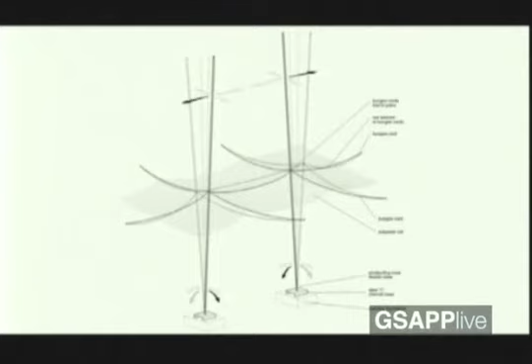Within this environment, we inserted activators such as hammocks, ladders and misters. Then these poles are connected to the ground with only a pin connection, allowing them to be dynamically moving within the system.

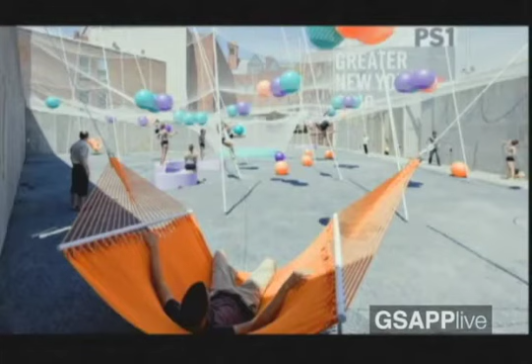And with this, various activators as we call it—the wind, the pressure of the water, and the people playing—the system becomes something that the subject engages with. With this structure, we hoped that the people would re-engage with the physical world and find playfulness within their interaction. Another important thing was really the desire to create an interior, so very much a space that you enter rather than an object. So the sensorial, the spatial, rather than the form-driven architectural project was something that we were trying to experiment with here.

Another component of this project is that within the small courtyard next to the big main space, as the environment of the immersive and interactive part of the installation, the 8 poles in this small courtyard have the accelerometer, which is this device that detects the motions of objects, embedded in them. A sound engineer programmed an application that would transform the data of the motion detected into a tone, music, or sound that can be played in the space through speakers.

And also some application designers have gathered this data and put them into an iPhone application so each pole can be claimed on your mobile phone, and through clicking through them you can manipulate the effect of each of these poles, the sound they make, and together. There's the play button—there's actually a play button here. Interesting.

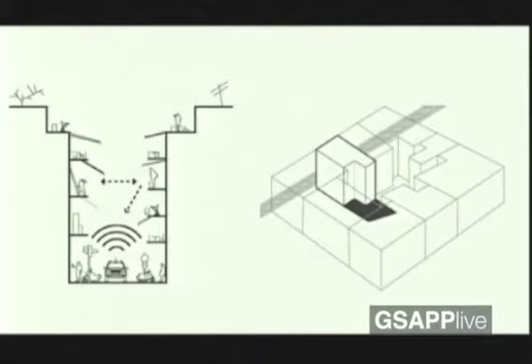The neighborhood is indeed in transition - a working class neighborhood, very dense on the ground, with typical loud streets, and yards in the back that aren't really used. There's a big disconnect between what's happening in the street and what's happening in the back.

Through a simple operation, possible within the local code, we shifted the bulk of the mass on the site and created an opportunity to make a new typology - especially one for the young, for college students.

It's a time in your life when you're still willing to rethink how to live in the city, how to live with one another. This small, simple shift also creates equality for all the units - a very democratic move, which seems quite appropriate for the location of the competition.

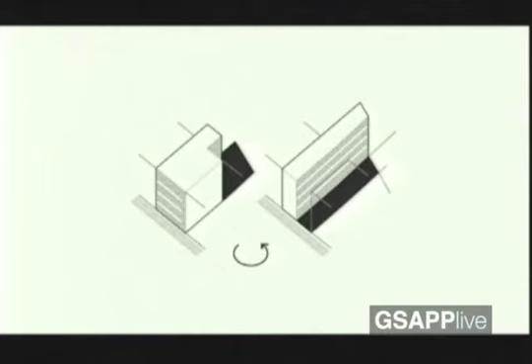What it also does is really open up the street into the yard - it opens up the block and brings the public in, allowing this zone to become a buffer between the units and the street itself.

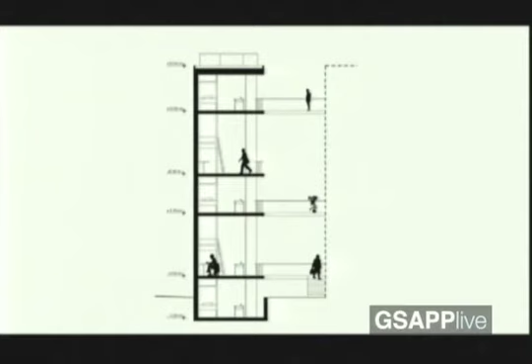This gives you a very narrow and slim section of building - 4.5 meters of building and 4.5 meters of yard. So we designed it very precisely, almost like a Japanese capsule hotel.

We wanted to give all the students their own private unit, not some large collective dorm-style living. Everybody had their own unit, but we organized it in zones, from super personal and closed, gradually to more open and public.

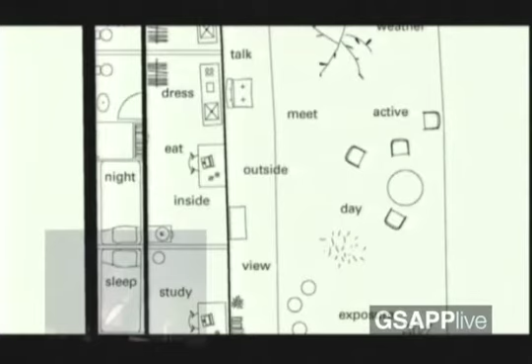I think the age for which this typology and building is designed is exactly you guys - where you jump from very intimate and concentrated modes to very open and exuberant ones. So we tried to pack these different modes into a very small, confined section.

Here you see almost a Frankfurter Küche-style efficiency in the room, where you study, cook, and sleep, with a view out to this yard.

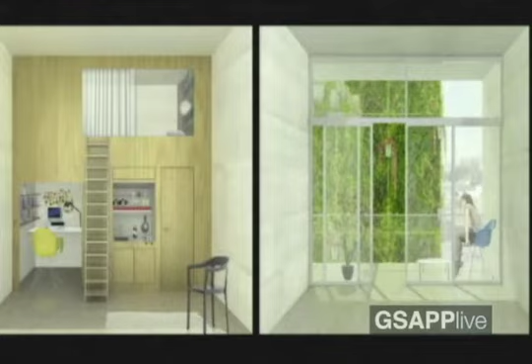This yard is actually a vertical yard, so you see all these lives happening within this elevation. We varied the section to generate some variety also in the spaces.

Ultimately there was a puzzle to try to get in as many units as possible - between 16 and 18 - with shared terraces as a way to move up in the building.

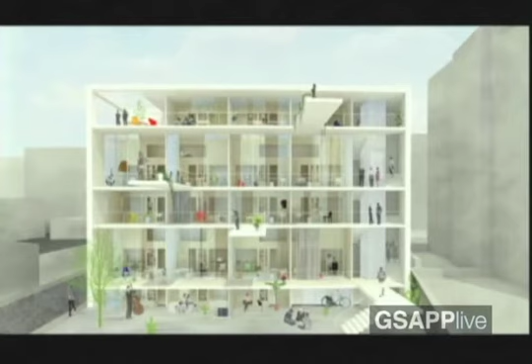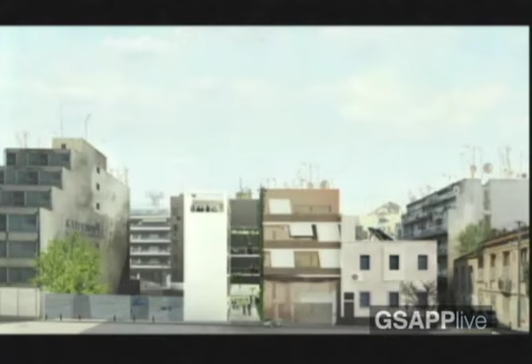Getting to your room means also passing somebody in front of their window - a way to stimulate social exchange as well. And there's the yard that can be occupied by students, with a very clean, simple, and abstract facade within this chaotic neighborhood.

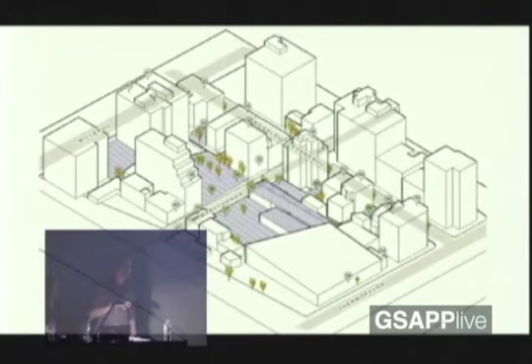Part of the competition was not only to come up with an answer for one type, but to look at the neighborhood as a whole and think of this as a viral typology that could start taking over the entire neighborhood. We were actually one of the finalists.

We didn't win the competition, but we were among the last 5, and could further develop the scheme - especially our strategy of opening up the block. If you did this on all sites, the whole urban fabric would start to change, and rather than having this hard division between street and inner court, you get a much more porous and diffused urban fabric. This was our argument as a strategy to take over the entire block.

What was interesting is that although we weren't selected for the final project, the next day this young developer called us and said he liked the strategy, and that it works very well on other lots he has. So we started working on a much larger lot on the other side of the street, right here, which is something in development now.

Obviously, also apart from the US, Greece is also suffering somewhat from financial constraints.

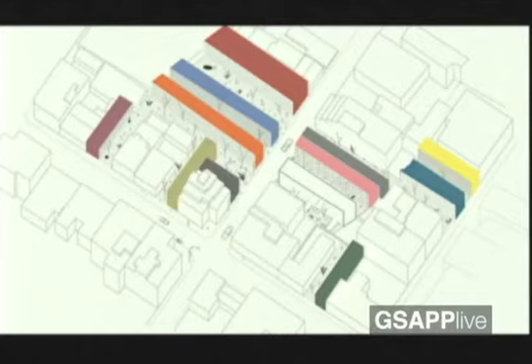So at this moment, let me show you where we are. This is the other side of the street, facing the site where we did the competition. This site is much deeper, actually, and it allowed us to think of more variety in typology.

There was a shift towards young families, and a desire for a coffee shop and a cafe. So the idea was that these different buildings, as it takes over the neighborhood, have different amenities that can be shared between all the units.

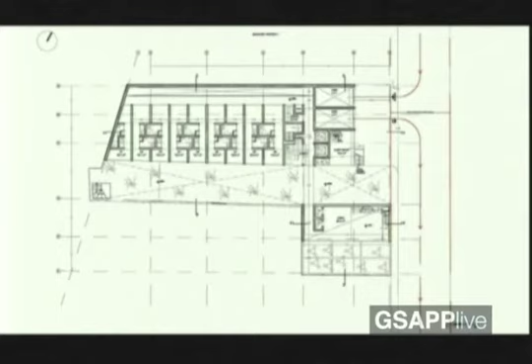The complication here was also that we had to include 3 stories of parking. So this became a very intricate puzzle, ultimately with how many units? Yanis, how many units did we have?

Yanis and Ilias from our office are also here. They worked very hard on this project. I think we ended up with around 50 units.

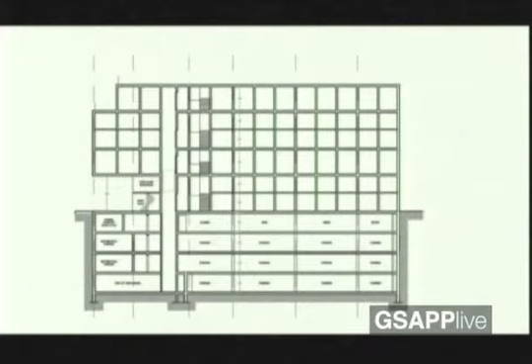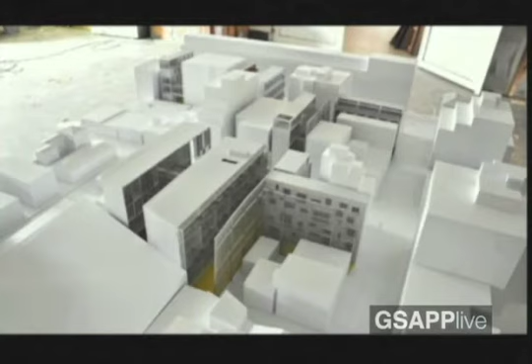This project at this moment is developed up to schematic design, but we continue to push it, not just to keep it alive, but also because it is an exploration for us of how you can think about the city. This is an exhibition we had in Beijing at Studio X, where we assumed that we had taken over the entire neighborhood with this typology, and wanted to see how it would develop.

Third project, which keeps us in Asia, is something we're working on right now in Seoul. This is downtown Seoul, basically the north. It used to be the old town. It's a view from a mountain towards the castle, the main castle. I'm sure there's people here from Seoul who probably recognize it.

This is, I think, called Samcheong-dong. Maybe somebody can correct me in the room if they know it better, but it's basically the old downtown area where there are a lot of old courtyard homes.

The idea behind this project is driven by two things. One is very local and specific, and the other is more our internal idea and research, or discussion that we have within the office. But as Mark said, we are here to speak about ideas as well, not just about solutions.

At some point, a student presented her work, and she said, well, this can be sort of kind of, well, whatever. We initially thought it was quite a lame description of her project, but then realized that maybe everything these days can be sort of kind of whatever, because in the past we made buildings to do something, but now we're doing a lot of this stuff online or in the virtual realm. So almost everything we make can maybe be sort of kind of whatever.

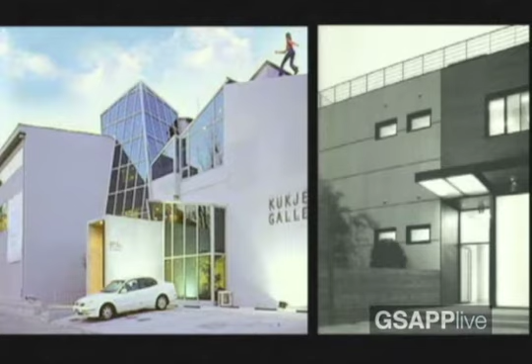Ms. Lee has been quite successful in doing that. These are her first two buildings, Kukje Gallery 1, which she started about, I think, 20 to 25 years ago, and her second building, Kukje 2. So those two were built, and when they came to us, they had sort of infiltrated this neighborhood. You see here these old holdouts of other homes.

But this neighborhood is becoming very popular. It's a very nice, walkable area where people come on weekends, young couples, to eat their puffy cream and drink fancy coffees.

We were asked to look at the third building over, which is here. The first two exist, and at this moment our work on this is expanding to redesign the first and second buildings. We're making adjustments there, but initially we were only asked to think about this third building, and we're working also on this fourth building now. This relates to Greece in a way, in the sense that it becomes a porous, semi-public piece of city.

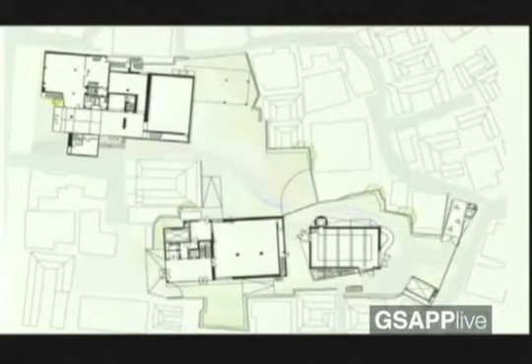Let's talk about this third building. The idea is this hard, simple white box moving into this dense, fluid, and historic fabric.

It's one of the multiple galleries, and Seoul is getting a little nervous about these larger boxes moving in. But the requirements, especially this one, called for a large project space—15 meters by 10 meters, 7 meters high—one big space for large installations.

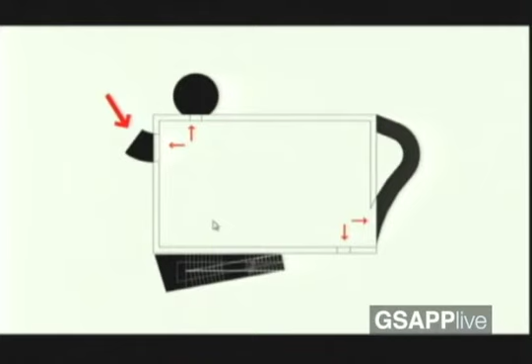So we provided them with the box, and in a very straightforward diagrammatic way, we pushed out the circulation and the entrances. You keep the pure minimalist white box, with a simple entrance, elevator, corridor downstairs, and stair up pushed out.

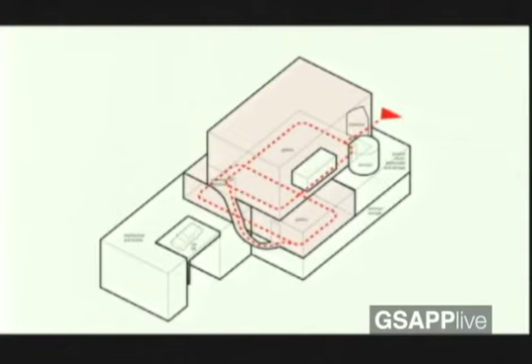It's a large basement. There's a lecture hall downstairs for presentations to their collectors, and a second basement with storage and parking. That's pretty much the scope—a simple white art space with skylights all around.

Daylight is important. Then we had to think: how do we bring this white box into this urban fabric? So this idea of deliberate ambiguity came up—making something that, because it's not hard-edged but softer and more diffuse, could act as a negotiator between this historic fabric and the hard edge.

Within traditional Korean painting, there's this idea of layeredness, a diffuseness, a fogginess. We also found a contemporary photographer they represented who captured that same cloud-like quality in their work.

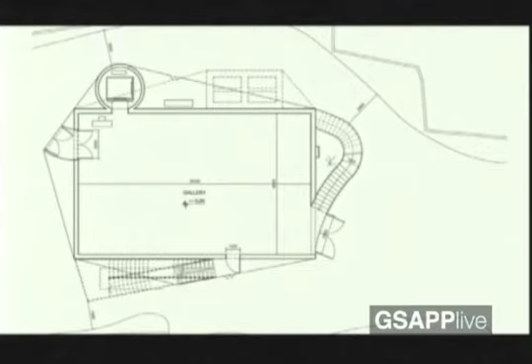We thought, what if we take this diagram and shrink-wrap it in a layer of diffusion, in a way? It sounded great.

And we made a model, and we indeed literally shrink-wrapped this diagram into this reflective sort of armor. We presented it, and Ms. Lee said, 'That's great, make it.'

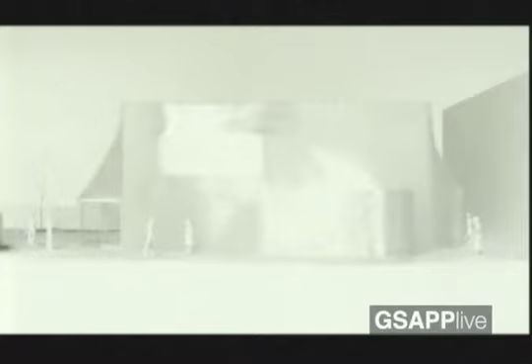We first had to get approval from the historic committee, so this is the file we had. Especially this diagram, I think, is quite strong in showing how well it fits within the neighborhood. And so we got an approval.

Then the question is, of course, great, but what is it? We had to think—especially because this is a double curvature, it's complex, but at the same time it needs to be exterior, so it needs to be strong. So what is strong, what is durable outside, and can take on a double curvature?

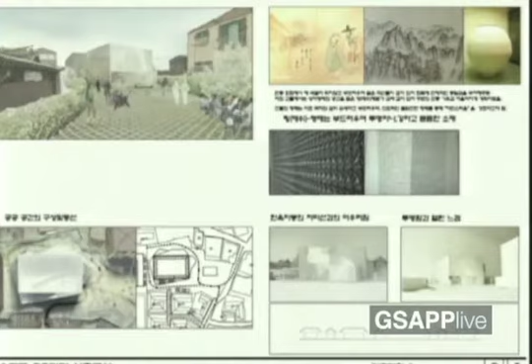The chainmail mesh—it's a very simple thing used for people that love the past. It's also used for belly dancing attire and for butcher gloves. And it's only made on the scale of the body, so quite small scale.

I think the biggest diameter, machine-made, is 13 millimeters—a little more than a centimeter—which is what you can buy from a manufacturer. This was too small, obviously, for the building, so we started to test by laser cutting different dimensions in our office to find the right size.

At the same time, we started to see that this material has these elastic qualities, and we began to play with how it works geometrically.

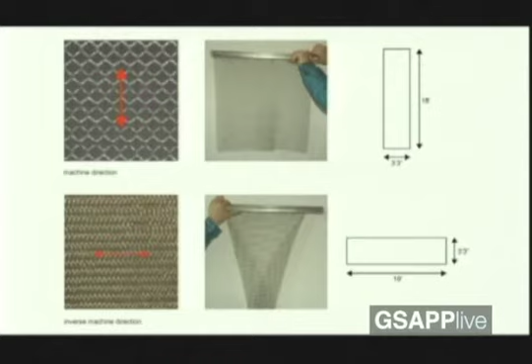We got a sample and started to see how it behaves—there's a sort of directionality—and we found that there is a way this thing stretches, which allows it to take on this double curvature.

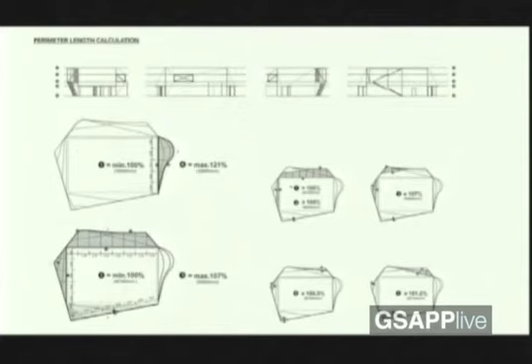So we mapped the entire perimeter of the building and saw where its maximum expansion and tightness would be. Obviously the roof would be 100%, and then you can stretch it along the rest of the surface area of the building.

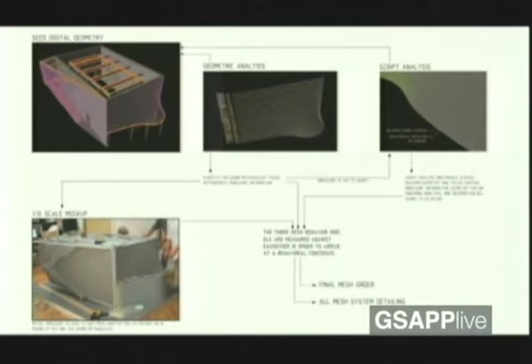And by then we realized, okay, if we're really going to do this, we have to get an engineer on board, and we actually have to figure this out, because this thing doesn't exist, and it needed to get approvals and survive earthquakes, etc. So we teamed up with Front facade engineers. We asked them if they wanted to help us with this, and they said yes, we're going to work together on it. We're going to do a digital trajectory and just a physical trajectory.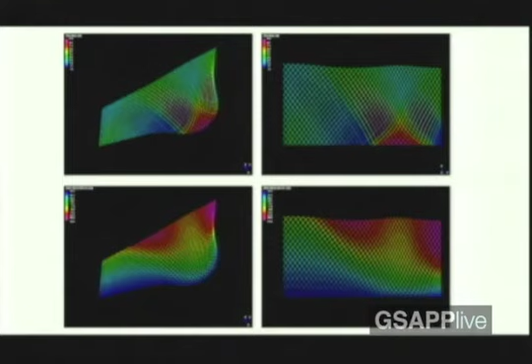So we started to do some really simple empirical testing just seeing how forces behave, because there's actually very little knowledge about this material available. And we started to see initial patterns of stress and how they behave.

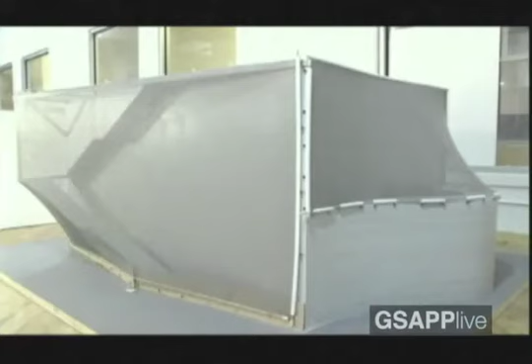This model became more complex, to a level where we almost have every ring modeled. And we built a large model in our office. This is a 1 to 10 scale model with the rings, to actually see how it would behave in its physical proportion. So it's really both, I think, that are important, both the physical and the digital, that need to work together, and it starts to, in a way, prove that these things can work to an extent.

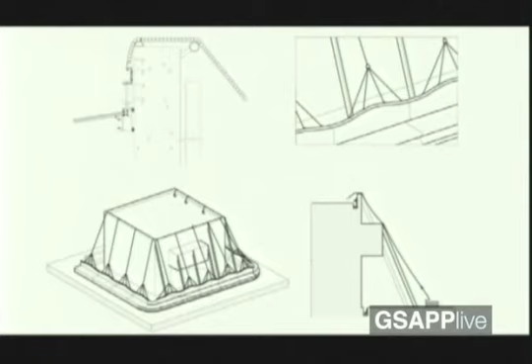By then we knew quite a bit about this material, and we also had to think of how to install it. We, together with Front, decided why don't we just fabricate the thing ourselves and deliver it, and probably we're going to be installing it as well, because these are all aspects you need to think through. So where do you go and get this?

You go to Alibaba.com. For people who are not familiar with Alibaba.com, it's sort of the Match.com between people that make things and people that need things. So once we put in an inquiry at Alibaba.com with ring mesh, we got a ton of factories in China, actually through Skype, pretty much approaching us.

One Skype name was appropriately called Ring, and so we started to chat with one of these people, and we started to work with them, and they actually provided us a large mock-up, or a large sample—I think 8 feet by 6 feet or something. It was a very promising Skype relationship we started to develop, and at some point, same as the people you meet at Match.com, you have to see each other in real life.

So we decided to go to China—this was about a little bit over half a year ago—to Anping, which is six hours west of Beijing. After quite an intense car ride, we ended up in this town, and it was a pretty rough town. You can buy dogs there. We ended up in this very small courtyard, I would say as big as the stage here, and there was our sample.

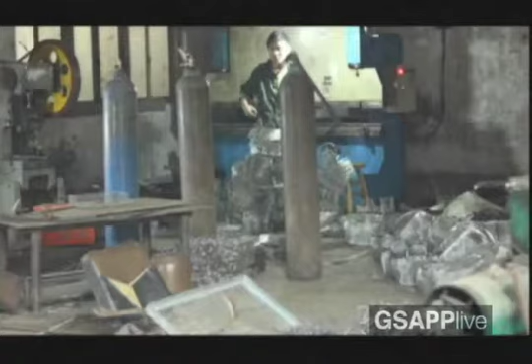And we looked around. This woman had just eaten her food, and this is a little room off of this courtyard. All the way in the back, there's one machine, and even behind that machine was one boy, and this boy was there hand welding these rings together.

So we had guaranteed to our client that we would be able to deliver this mesh, and this was the moment of realization of what we had discussed. The man here on the left also realized, when we told him there were actually 400,000 rings, that it would probably take him more than 10 years to put the facade together.

What we did is we took this sample and went to another company, because smartly Jing had seen that most of the Skype reactions actually all came from this town, Anping. A more aggressive company took the sample and said, we can do this. Within 24 hours, we found a number of companies that could do it. So Mike was happy again.

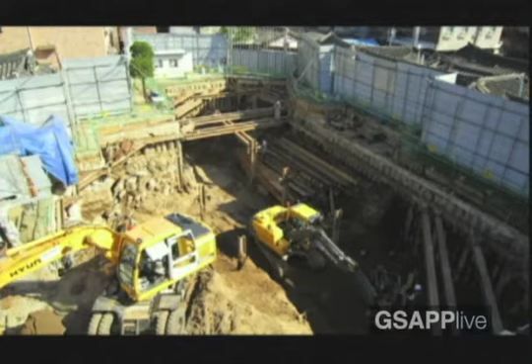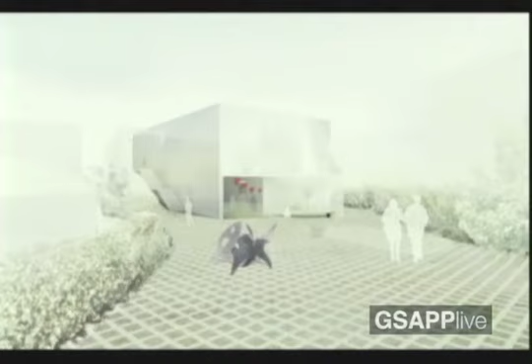Well, now at this moment, we just commissioned one of these companies. The other one, the one with the tiger, is actually making the mesh now. So we could happily start digging, and this was just two weeks ago. They finished all the pouring of the concrete, the foundation, and the project should be done in November. After this project, we're going to continue to work on these other projects on that site.

So this next project is also in Asia. It's a 400 square meter exhibition space erected in the mid-center of Beijing, in a newly built center that's mimicking the Rockefeller Center development. A culture festival called Get It Louder, led by culture curator Ou Ning and architecture curator Eric Shan, approached us two months before the opening and asked if we could do an exhibition and pavilion space for screening and lecturing programs during the festival.

And we said, because we never say no, we said yes this time too. So two days later, we got a project schedule which indicated that we needed to deliver the construction documents the following week.

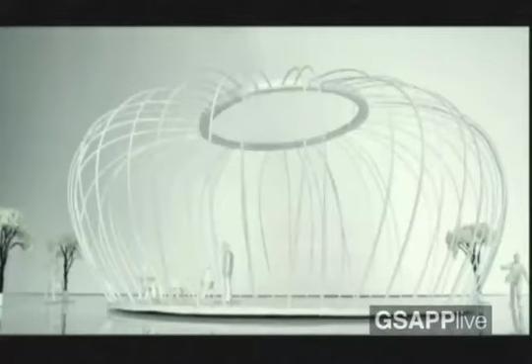But we remained optimistic and proposed something very quick, along similar lines to the unstable structure we'd experimented with at PS1. Our proposal was vertical structures connected only rigidly on one end, and gathered on the other with a tension ring, held down by adjustable weights. By manipulating the weights, you'd get a different curvature of the vertical member, creating a shifting, transforming form for the pavilion structure itself.

To keep the rain and sun out, we'd simply put a tarp on the upper portion of the pavilion. This tarp could be changed from one location to another, since the festival was supposed to take place in Beijing, Shanghai, and Guangzhou.

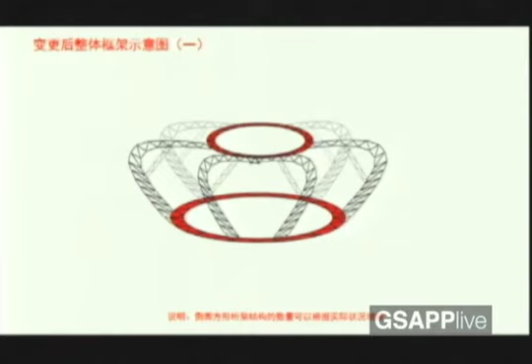So they liked that idea very much, but said in Beijing we have very strong wind, so the unstable structure isn't going to work. They said, 'we will approximate your engineering solution with our engineer, and this is our approximation, and this is the detail. Thank you very much.' And before we knew it, it was erected.

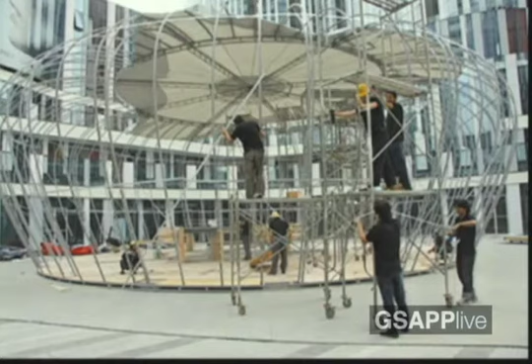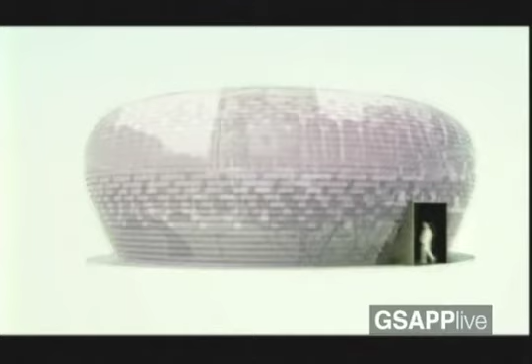The next question they had was: about this skirt, we like it very much, but for the same wind reason, we need a little bit more substantial skirt. This time we learned our lesson, and within two days we proposed a solution to hang stainless steel panels on the horizontal members spanning the vertical members, connected only loosely at the top. So when the strong Beijing wind comes, it would create a ripple effect on the skin of the building.

So they said, oh, that sounds like a great idea. The only thing is that the stainless steel is too expensive. If we change them to plastic and make them thicker, they should achieve exactly the same effect. We found these colors available on the market - we think these three colors match your stainless steel specifications, but please confirm.

So we pondered for a few hours and concluded that if the subtlety we intended with the stainless steel panels couldn't be achieved, then maybe we should go for alienness instead. We said, let's go with shocking pink, since shocking pink luckily has quite a few variations within that family. We thought subtlety and alienness are the two ends of the same sliding scale of differentiation, so with three shocking pink variations, we sort of got both.

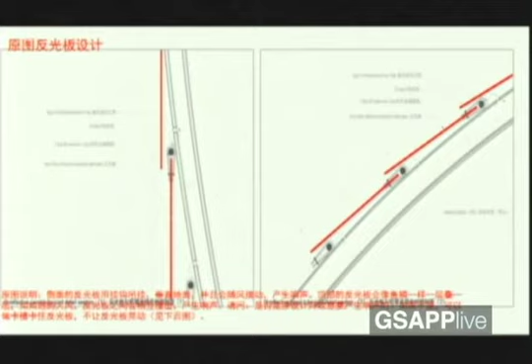By this time, when our underground local staff told us that our custom detail for the hinge was replaced by tie wrap, we were not so surprised, and not so disappointed either. I think we were actually quite pleased that, by this point, this tug of war relationship with the clients and contractors, and the situation where no one can do anything about it, was fascinating to us. It's a new relationship that's constantly shifting and transforming, and maybe in this situation everyone is a winner and no one is.

I think we asked for a mock-up, but they sent us an invitation to the opening instead, and said, why do you need a mock-up? We already built the thing. So with this invitation, I flew to Beijing, and looking at this shocking pink building in front of me, I was wondering if we are the author of this design.

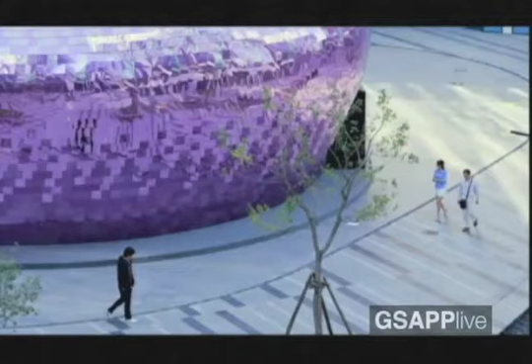I think it's precisely from this kind of hybridized dynamic that these bastard typologies and mutant materials are formed. There's something interesting in that the architect will not be the person who holds the iron stamp, but rather we are the people who can negotiate between different peoples, different ideas, different places. Maybe we can be the interface between softer links, in this new energy.

I never actually saw the thing because it went so fast I didn't have a chance to go there, but the video is the same—it's the most information we have. When it was published in the magazine, a writer said it's rare to see a pink, shiny building so contextual. So I think with this story I can clarify why it was very contextual.

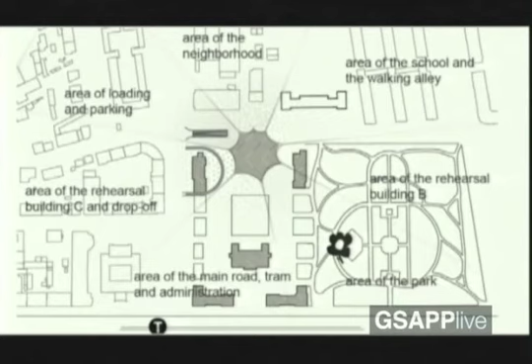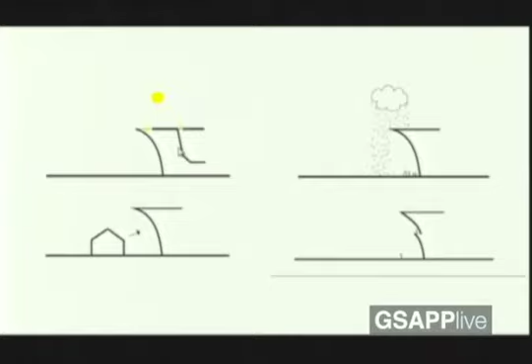We were able to get all the auxiliary program and facilities into the old buildings and make the concert hall itself an individual room in the back of the site, which you see here. The form opens up towards the city, allows daylight into the space, including into the concert hall itself, which is quite exciting, and it also tries to respect the space of the old buildings around it.

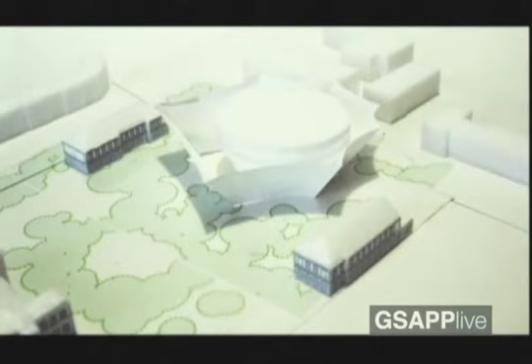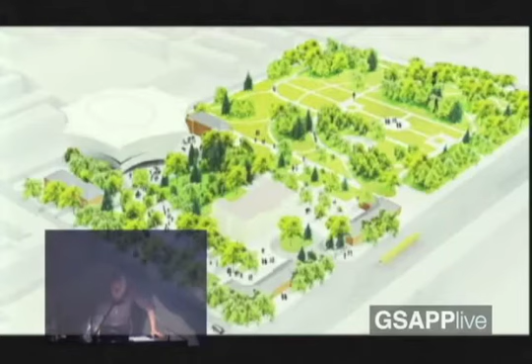So here you see, and it was in a way a struggle to see how big such a space or such a hall needs to be. This is the overall organization, and its relation to the park, and sort of the way we opened it up by making the entire perimeter permeable.

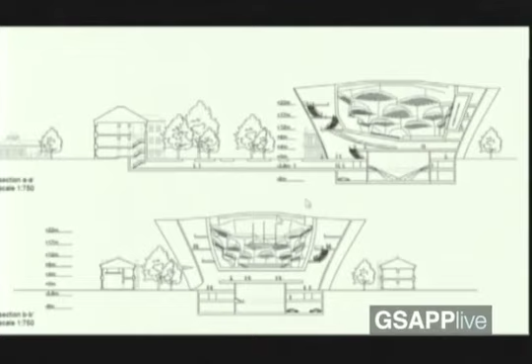The hall itself is actually quite straightforward in the sense that you have the concert hall, which needs to be an enclosed, acoustically sealed space, and then you have the lobbies, the foyers that can happen between this interior skin and exterior skin. There's a large orchestra rehearsal hall underneath, visible from the lobby, and a second lobby where people with tickets go, and they move up through staircases between the inner wall of the hall and the outer wall of the form.

Here you see the lobby and sort of the underbelly of the hall as you move up.

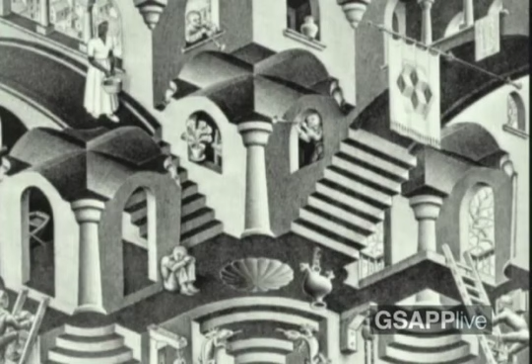For the hall itself, it was very interesting. There are basically two typologies of concert halls. One is the shoebox, which is a deep, classic type like the Amsterdam Concertgebouw or the Vienna Musikverein. And then there's, since Scharoun, the much more dramatic and currently desirable vineyard setting, also used by the Disney Hall by Gehry. There's a shift from listening to seeing—people like more dramatic halls where the sound is actually less great than the straight box where the acoustics are good, but maybe you can't show off your new mink coat. So there was a drive for this vineyard type setting, and it means there's a new architectural project within the design of how people are organized within that space.

The vineyard is a very dramatic, visually rich type, so we went in search of an image we could use as a source of inspiration. This is an Escher drawing—obviously the mathematician who made complicated geometric drawings—and this became something to chase within this design.

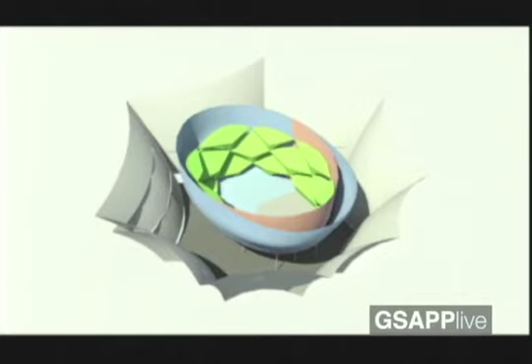What was nice is that the dialogue between Arup and us was very collaborative, a back and forth type of method. We had to come up with a way of working where we could refine the acoustics and get this architectural idea in there at the same time. The idea of this Escherian construct was also to make a scaffold, like a network that would sit loose as an individual structure within this acoustical shell.

So you have an acoustic shell, and within it is this really open, lace-like, mesh-like independent structure where people would sit, allowing daylight to come in behind the seats and people to circulate behind the seats.

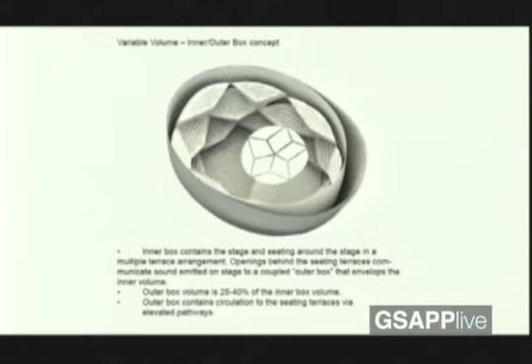We developed this concept of variable volume, where the acoustics of the hall can dramatically change depending on the volume made available. This inner seating structure could be closed off so the volume of the hall could be reduced, giving a different reverberation time, or the entire space could open up.

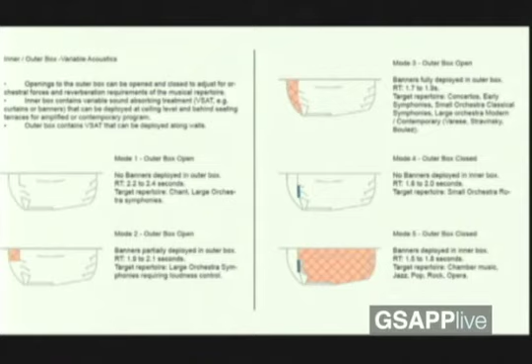This was for larger orchestras. The other part was the acoustical pod, where the walls behind the seating would reflect the sound back.

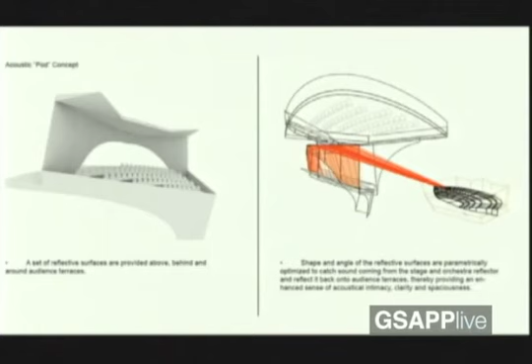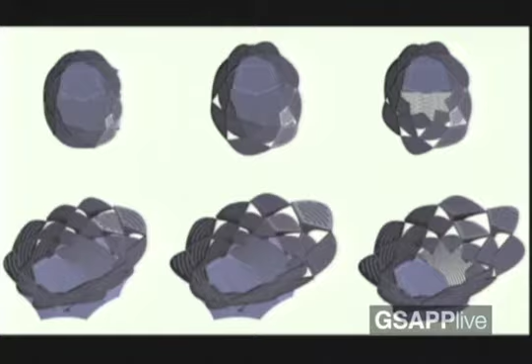These parameters were given by Arup, and we worked with them very closely. This movie shows basically a parametric model we came up with, which allowed us to continuously refine the shape of the room and change it while sticking to the parameters given by Arup. So we only had to fix the room at the last minute, but at the same time could guarantee its acoustical performance.

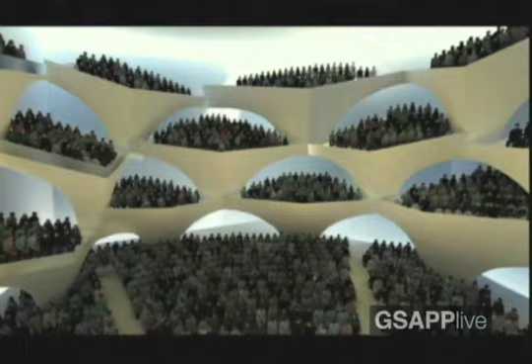This one we also didn't win, and we will continue to do more competitions until we win one.

And now Jing is going to show our first project. Yeah, this is our first project—also the last project of tonight. This is the project that Mark referred to in the introduction. In many ways it was the first, and it was the perfect first project because it made us think about some of the most fundamental issues within the architecture discipline.

It is a single family, or more like for an older couple, holiday house sited along the Hudson Valley in New York State, in Garrison.

The project is a weekend house for this modernist graphic designer Ivan Chermayeff, who's portrayed here, and these are some of the projects he's done in his life. If you're not familiar with him, basically he cleaned up all the mess of the pre-modern, pre-corporate logos and fonts in America, and continued to work in this modernist tradition to this day.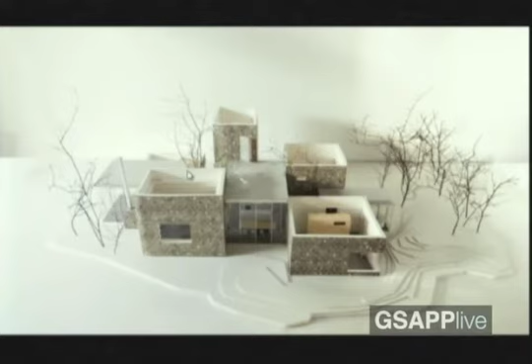The common programs - the living room, dining room, library, bedrooms, and bathrooms - each have their individual volumes, and they're all connected and separated from each other by this unenclosed courtyard in the middle. There are two of them, one here and one over here. This configuration allows passive cooling to go through the building. We tried not to cut the magnificent trees around the site, and also have two in the courtyard, using them as shading to eliminate active cooling systems.

We'll be playing the film that Mark referred to earlier, which will talk about the design in great detail, so I'm not going to explain it too much.

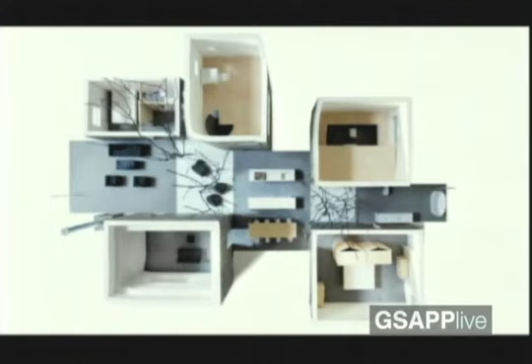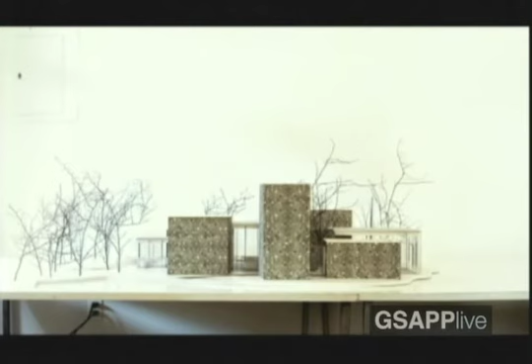Unfortunately, this project was cancelled right after the CD was completed - after we got a building permit. Even after we got the building permit, but fortunately we were able to capture some parts of the story with this short interview we produced with Ivan, which is part of our show at the Forum two years ago.

I miss the tower, don't you? I do. The greater exaggeration of the heights, I think, was an important thing.

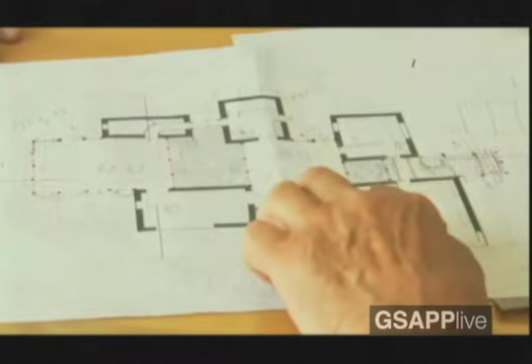I think essentially the brief is the flexibility of having guests and family from time to time, but basically it's the two of us, where I can make a mess and where Jane can make a mess. I like to do my own artwork and make collages, and my studio doesn't require a lot of space because I don't do large paintings, so I'm not chipping away at big stones with hammers. But part of the plan of the house is to have what could be called studio and workplace for Jane, separated from mine, so that we're not interfering with each other every minute.

Where we found this site - I would say it looked out, if one could see through the trees in all directions, probably more than 300 degrees out of 360. It was geologically very dramatic in the sense that its rocks and hills came up in very quick succession, so it's very three-dimensional.

This is a house, I think, that grew out of the client and the site and the problem, because there are two spaces which are completely open to the sky, so that means another kind of light. If you're in one or the other, you're looking through the real space - real in the sense of dirt and sky - to the other space, so there's a sense of enlargement of what you do have because of this mixture of indoor, outdoor, open, closed.

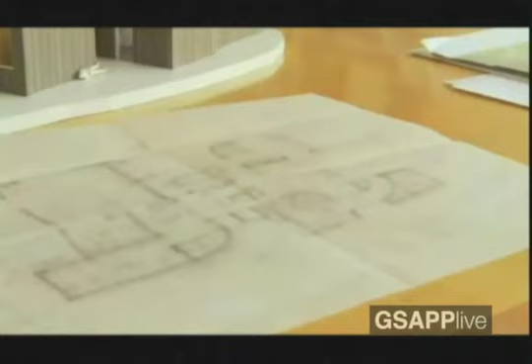Well, this is a nice site, which I still own. Someday maybe they'll build this house. I think this is too personal. It's also, as you said, the architecture is very different from graphic design—you have to, it doesn't always happen.

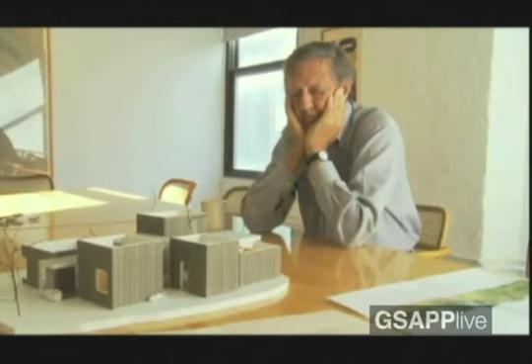Yeah, but it's too bad, because I think if I could just afford it, it could have been expanded, and I would love to have it—not just for myself, but because Sam needs it, and it would have to be helpful to him.